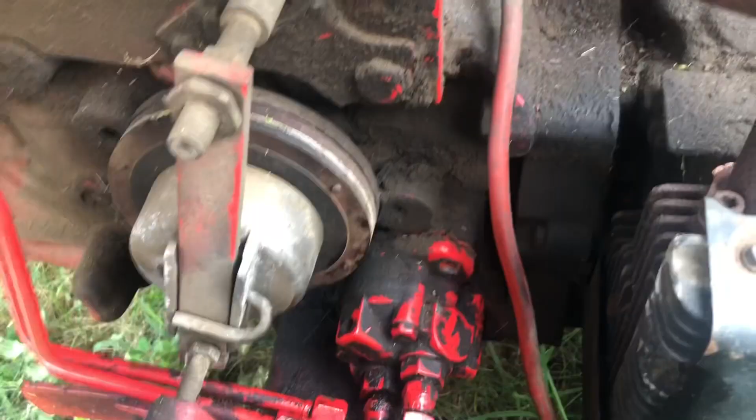going wrong. Oh, look, $2. Perfect. All right, check it out. $2.12 from the old Harbor Freight. It's got the 5/16. It even has a 3/8, and they're short. What do you know? And if I have to cut it, it only costs $2, so I don't give a crap. Awesome. All right, so got the old Harbor Freight short hex key, Allen key here.

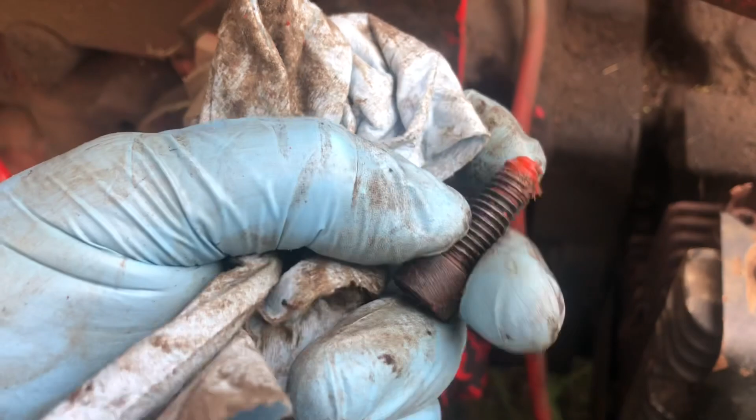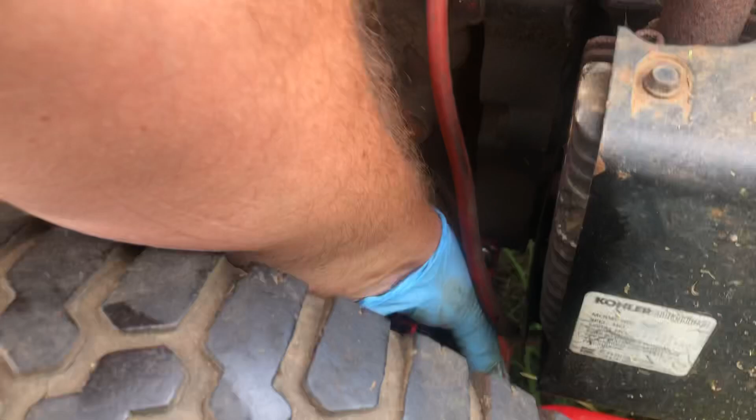I was able to get that bottom screw out, and again, you can tell someone's been in here. It's covered with RTV, which it's not supposed to really have. It's supposed to have a gasket, so let me see if I can get this stupid pump off. Oh. Let's see what's flying with this pump. So the question is, does the pump turn? Number one, it's turning, and I actually see oil coming out of it back here while I'm turning it, so I think the pump is good.

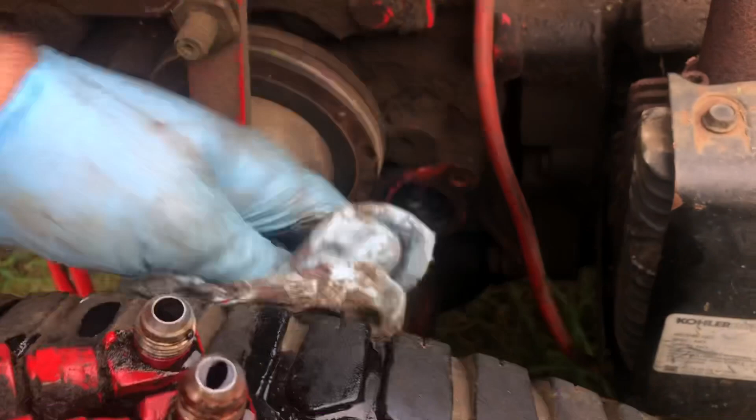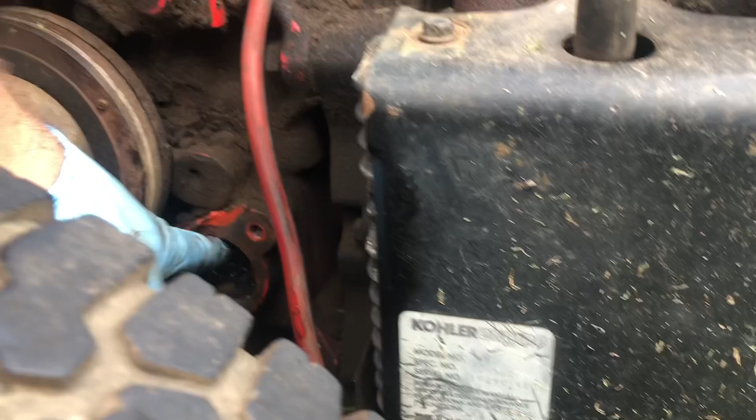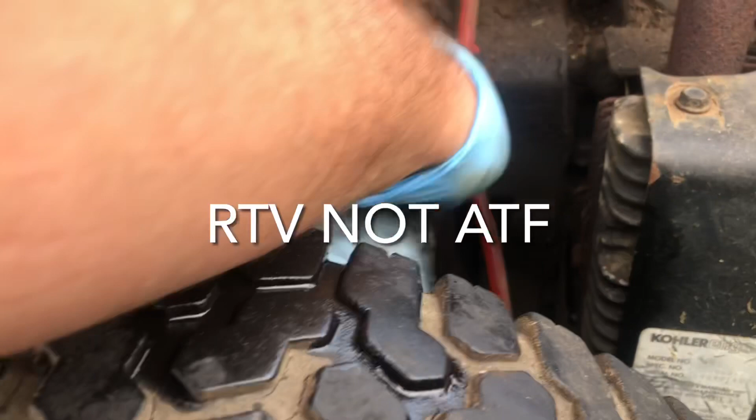So why isn't it working on the tractor is the next question. I'm getting ATF all over the tires. Awesome. So let's take a look in here, and what I want to do is actually start up the tractor and see if that thing is spinning. I just have a feeling that all this RTV on here or something jacked out the pump so that it wasn't engaging properly. And there's lots of milky looking brown oil on here.

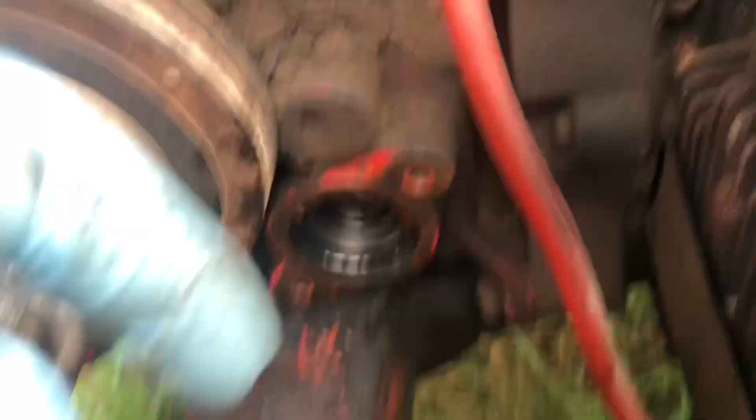Now, I don't know if I start up the tractor if oil's going to shoot out of there, but I just want to make sure that this thing is spinning and engaging. That's my number one concern here. Like, is there a key that's broken inside this gear here or something like that? It's all marred up like it wasn't properly engaging, I'm going to say that much, but the pump looks like it's working. So either this thing's not spinning or I have a problem with the hydraulic valve assembly. So let's see if we can start it up and check it out.

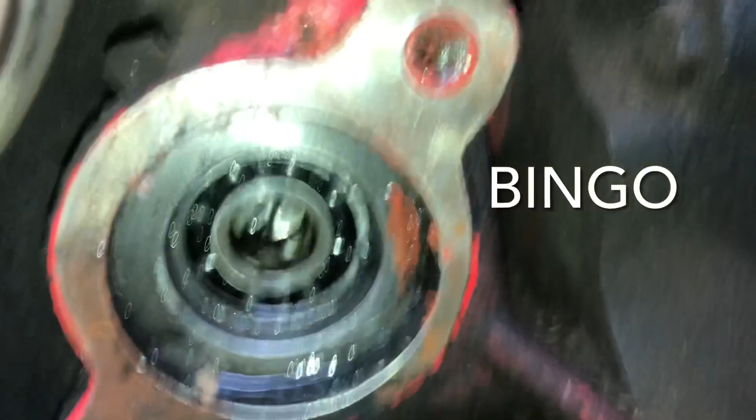So, I don't know if you could see in the video, but I was hitting the key off camera before it started and it wouldn't start. And the stub shaft wasn't turning. And I put my finger on it and just pressed it a little bit. And it started to go into the transmission. I'm like, whoa, that shouldn't be happening. Something had to give way internally on that thing. So, we are going to have to pull the engine off to diagnose it.

And we got the 8163B parts tractor over here, which I planned on taking the engine off of this thing. So my new goal is to pull the engine off the 8163B rust bucket and to take the gears out that drive the PTO pump and put those into the 20G. In the meantime, we are going to pull the flywheel off the 20G and investigate the magnets for the charging system before we start to dissect the whole transmission and everything. So let's get to it.

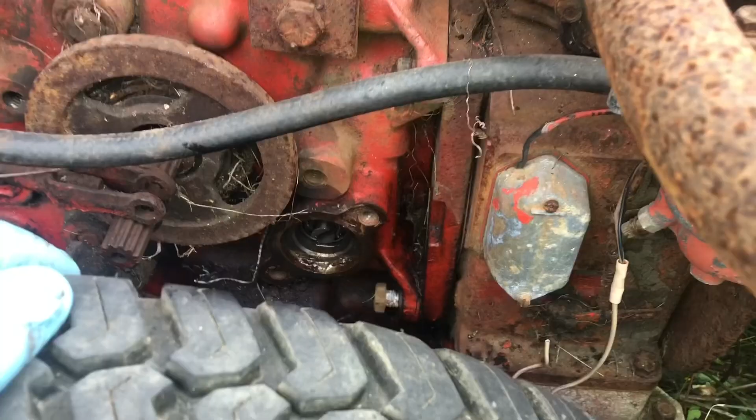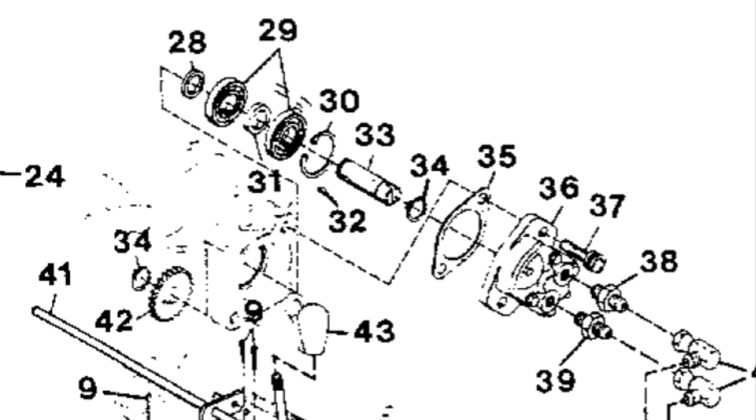Listen, this is the old junk parts 8163B over here. And I'm going to bring you down to look at the stub shaft in here. And this stub shaft here sticks out. And you cannot push it in or anything. It's locked in there solid. That other stub shaft, I was able to push in and it won't turn or nothing. I'm pretty sure that what happened is the snap ring, part 34 here, broke off the shaft and it's letting it slide back into the transmission.

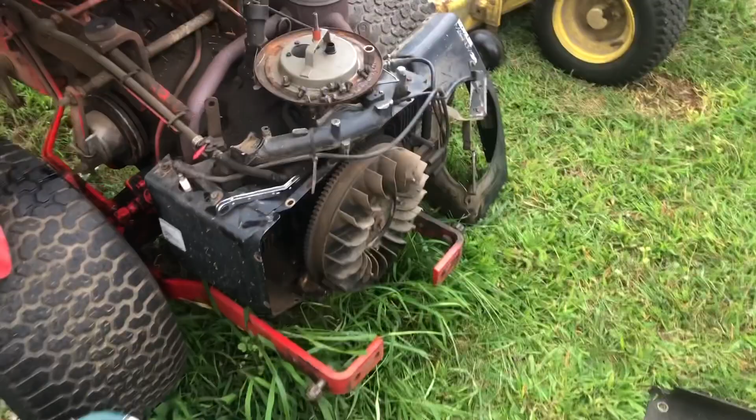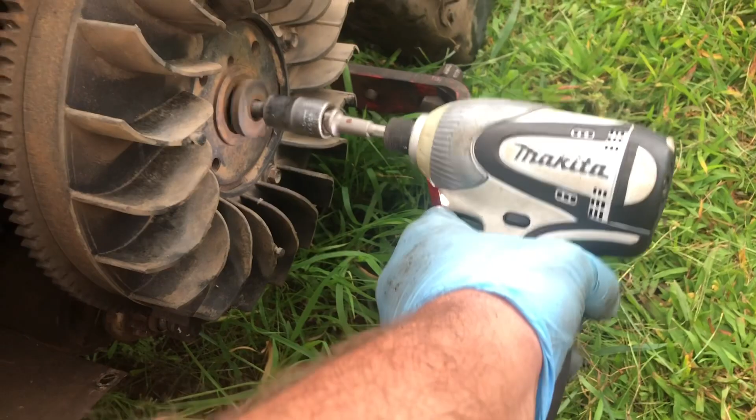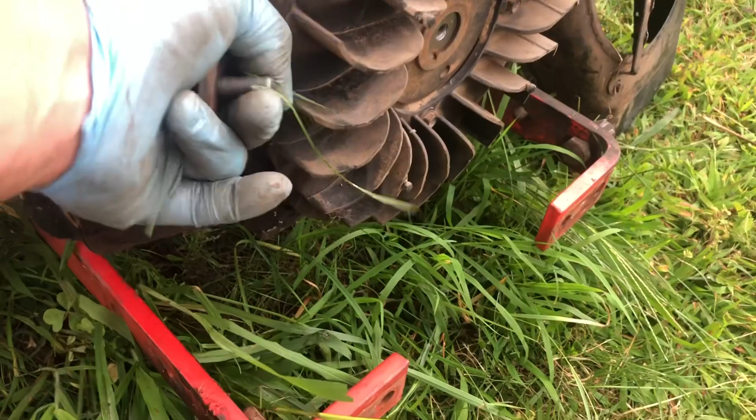All right, so back to this tractor here. I got the shroud and the rear guard off the back so I can investigate this stator issue. And I don't know if this thing has the balls to do it, but I'm gonna try to take the bolt off the flywheel here with my Makita. Let's see. Holy crap, it actually did it. I am shocked. That's awesome. So anyways, we gotta set up the puller and everything here and try to pull this flywheel off. I don't know that you can touch the back because the stator goes all the way around.

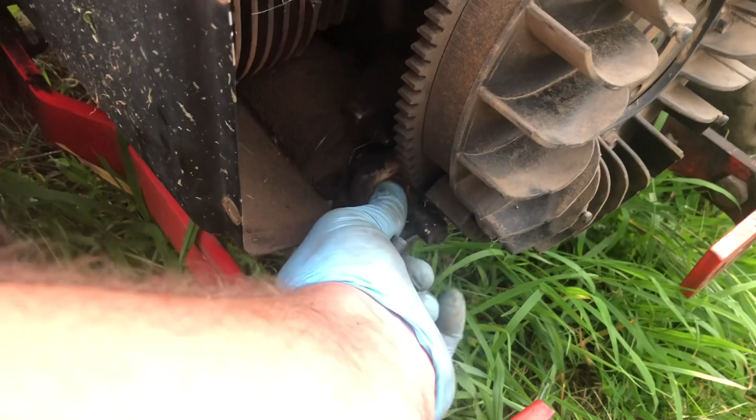By the way, disconnect your spark plugs before you start screwing with this, because if you turn this thing with the electronic ignition, there is a possibility it could start up by accident or something, so I don't want to take that risk, even though the key's off. My Bendix needs some lubrication too. While I'm in here, I'm going to lubricate it. It didn't want to go up when I was trying to start it, and I can hear it's squeaky, so we'll work on that too. But we got to pull this flywheel, so that's our next step.

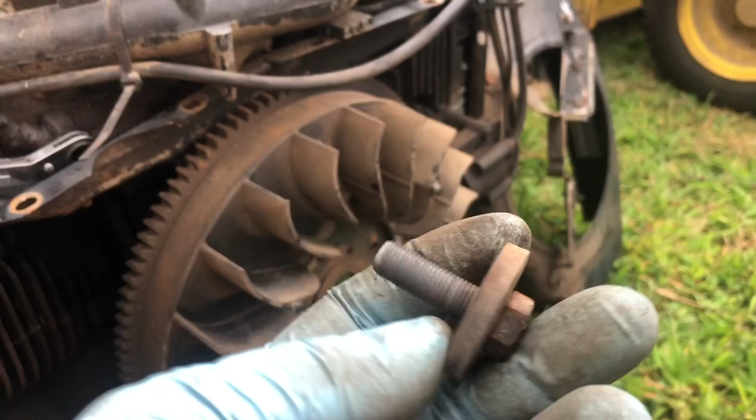And this is using a 3/8 fine thread bolt. The holes in the flywheel use a 3/8 coarse thread, so I'll get my puller, and I don't know if I have something that I can just put over the flywheel here, like a little piece of metal, so that I'm not going into the threads with the puller. But that's kind of the next step here, is to pull it off. So let's see what we can find to do that with.

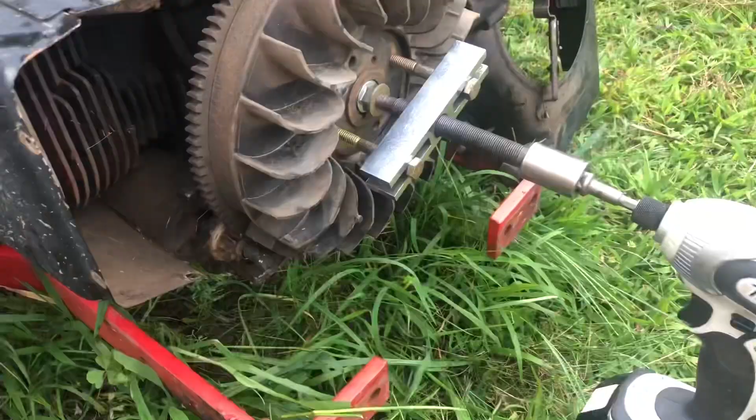All right, so I got my flywheel puller here on there. I kind of rigged up a big nut that I had that covers the whole top of the crankshaft, and I put a little washer on there. I don't know if it's going to work, but we're going to once again test the balls of the Makita. Let's see what happens.

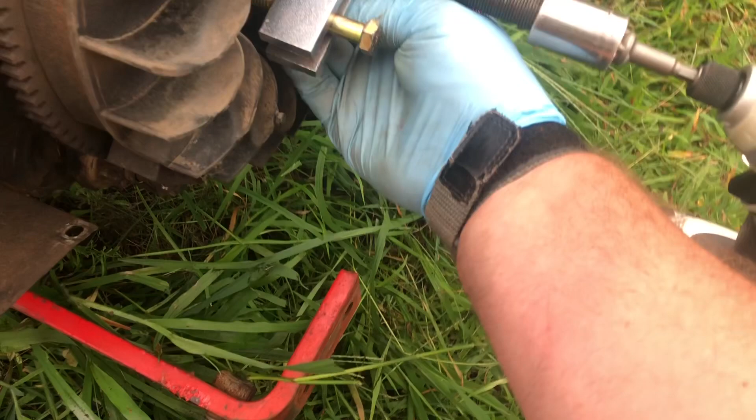I don't know if that nut is hitting the flywheel. Let me try to reposition it upside down. I don't want to bind it up or something, but yeah, it definitely moved a little bit. So let me put the nut on upside down and we will try it again. You see how there's quite a bit of room in there? So let's put this nut on upside down, and we'll make sure it wasn't binding on the edge of the flywheel or something.

All right, so let's give it another shot here. Let's see what happens. Oops, I had it in reverse. Oh, I gotta reline it up. All right, let me check my rotation. All right, we're clockwise. Let's try this again. Let's see. Oh. Not working so good. Drill doesn't have the balls.

The nut's just slipping on the shaft and it's not staying in the center. So maybe that ain't gonna work. I'm too far away from my compressor for the air line to reach out here. So I was hoping I could use that little drill to pop it off, but I'll use the breaker bar, see if I can do it with that.

Man, that thing is tight. I don't even want to screw with it. I just want to let it sit the way it is for a little bit. Let some pressure go on there. Oftentimes you got to whack this with a hammer here. I mean, this thing's solid. I'm moving the whole tractor. So maybe I'll just grab a big hammer and give this a pop.

I don't think it's helping that my nut and bolt setup here is kind of, what's the right word? Not the best. And I suppose I could thread this bolt back in there tight and press against the bolt head, but I really didn't want to risk messing up the threads inside the crankshaft. That would be a really big problem. So let me give this a tap with a hammer and see if that loosens it up.

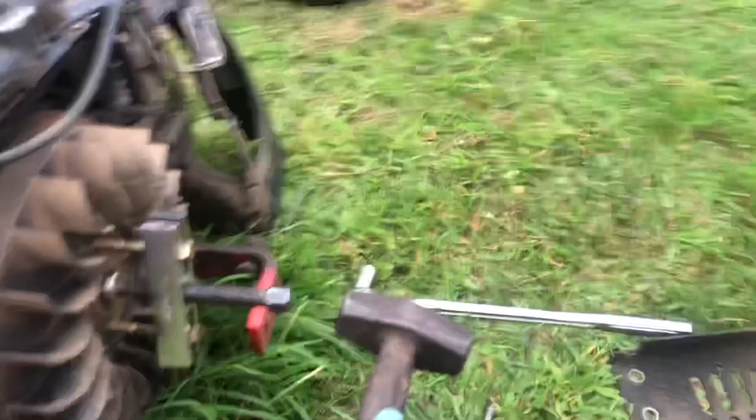All right, so I'm back to the tractor and I got my trusty old True Temper stone hammer. I found this on the side of the road one day and it's awesome. Let's give it a couple whacks. Well, it loosened up, but it probably just pushed the puller into this nut that I got on there. That's probably about all it did.

So let me get my 3/4 inch wrench on here. I'll give it a little tighten again, and give it a couple more pounds. That's probably what's happening. It's probably just pressing into the nut. Let's see.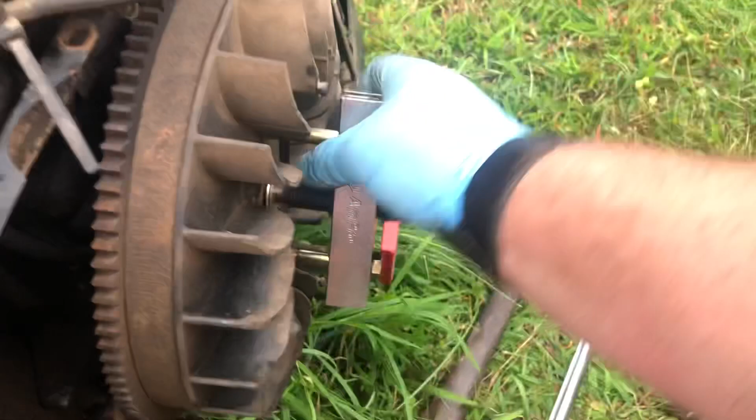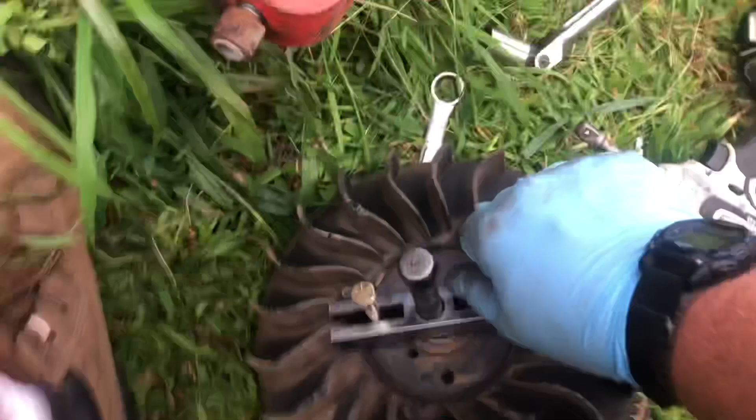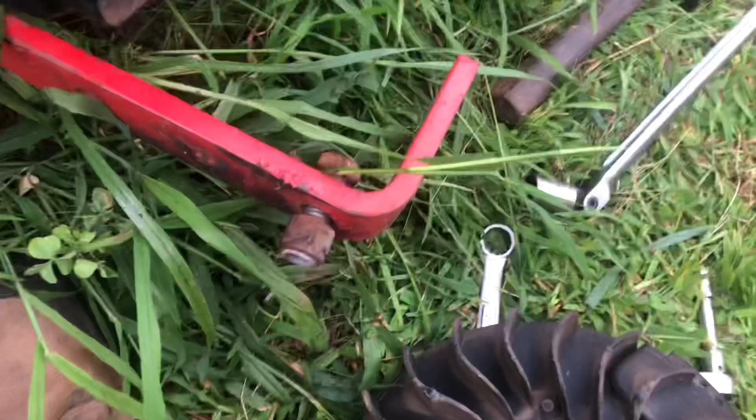All right, guys, so I put the breaker bar back on there and I gave it about a 1/4 turn and she popped off. So let's pull this deal off and check out how ugly the magnets are. Come on, baby. Oh. Gotta be careful not to break these plastic fins on the flywheel. In fact, let me pull off the puller before I go any farther here. Let's see. I should have just unhooked the plastic fins first.

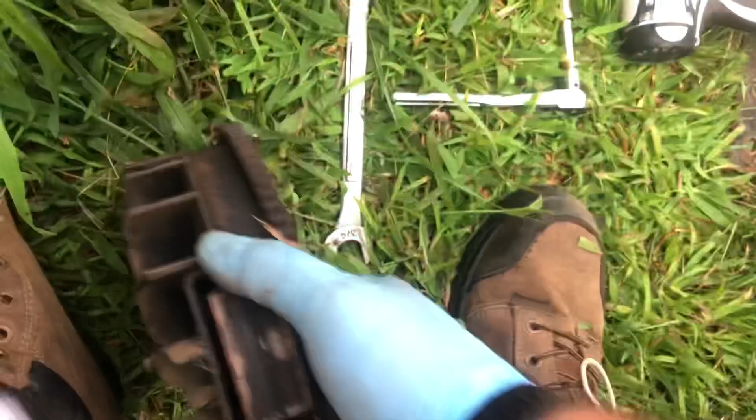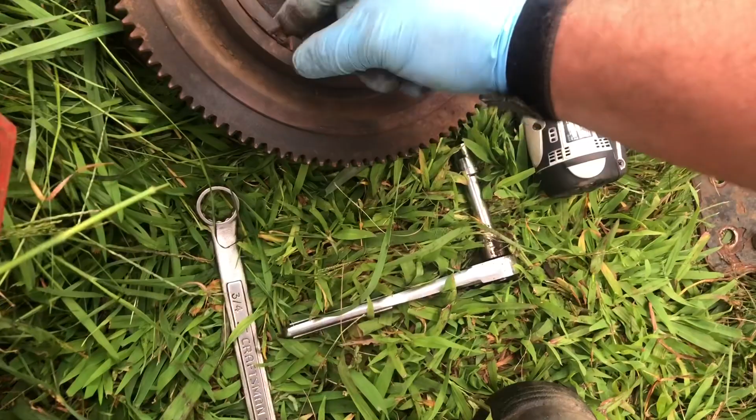All right, here's the moment of truth, guys. Let's see, what do we got? Oh, dude. Careful, fins. All right, that magnet's broken. That's dirt. Is that dirt or is that a broken magnet? Yeah, so this magnet looks intact. This is dirt. This magnet looks fine. So it looks like I'm down 2 magnets on my stator here.

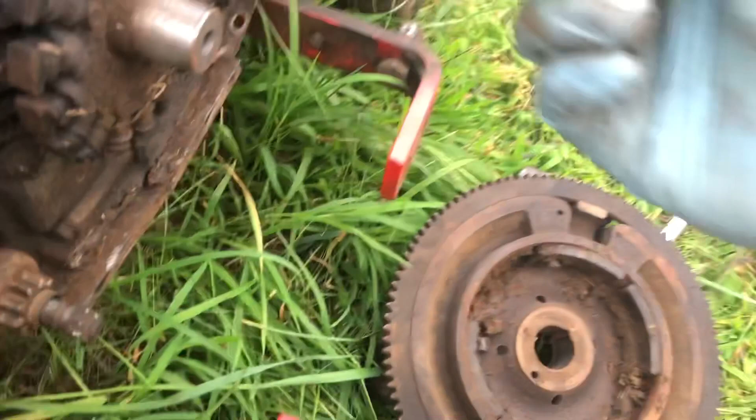Here's a piece of magnet. Is this one good? This one seems to be intact. A little rusty, but it's intact. So, you know, I think that I got to get two magnets for this thing. Here's the pieces of that other one. And oh, look, I got lucky. Here's a magnet that was just sitting on the stator, glued to it.

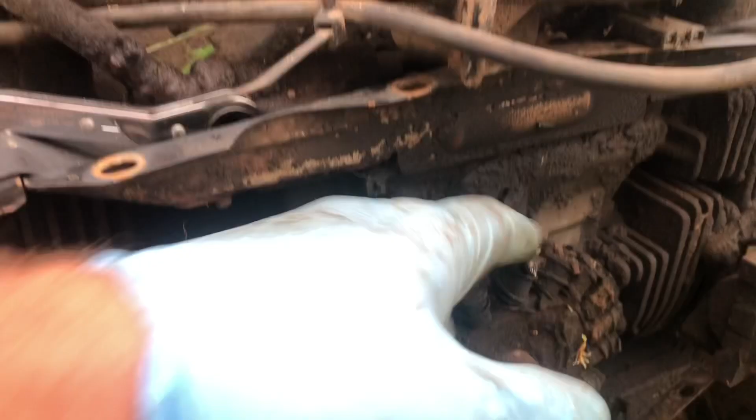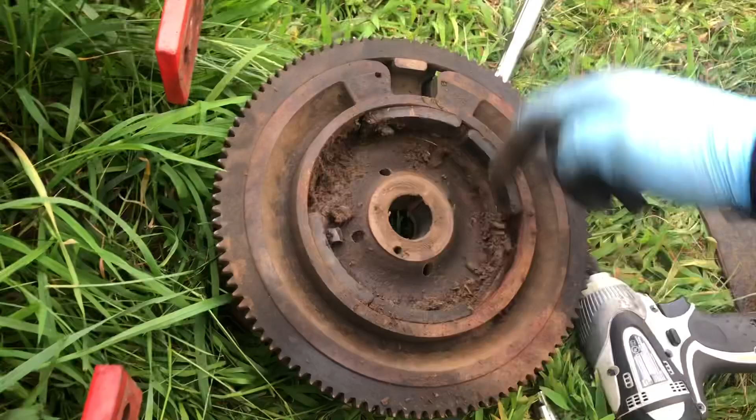And the stator itself is smashed also from the magnets prying against it. I kind of figured that would be the case. So I'm really down 1 magnet. And I don't really know how you pull a magnet out of a flywheel or not. But there's a guy that sells them on eBay in pairs of 2. So I think what I'm going to do is buy 2 of them from the guy, and then we're going to JB Weld them all back in, and hopefully we should have a good flywheel again.

And the stator here, I got to pull the specs on this engine. It's probably a 20 amp stator. And I can easily get a stator or put one that's a replacement on my shelf in here, because that's nothing special. I believe it's the same as a K series stator, so pretty sure I have one of them floating around. But this thing is schmotzed up pretty good, and we are going to have to pull that engine, like I said, so that we can address that PTO gear inside.

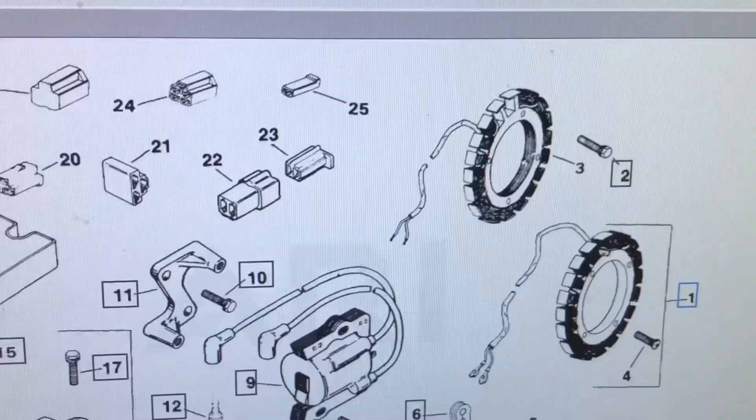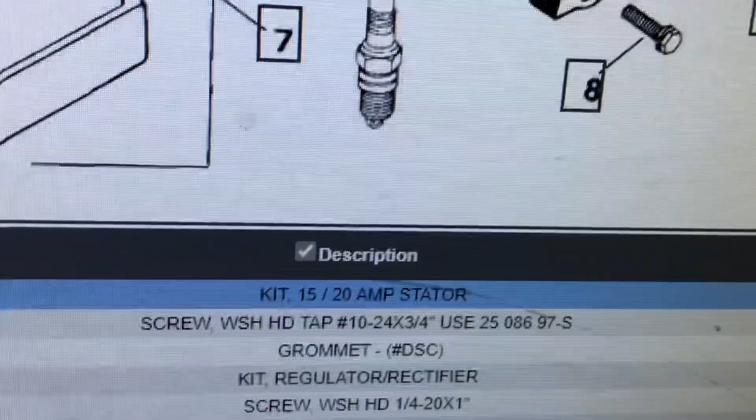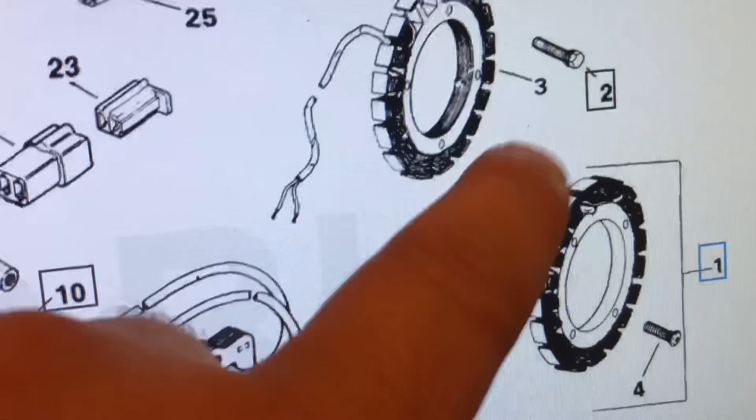But fun. Well, I'm checking out the parts list here for the Kohler, and they got this stator over here, part number 1. Come down here, it gives you the part number, 15/20 amp stator kit. I don't know what the difference is, whether it's 15 or 20, but see how this one has those 2 blanks? I always thought that was a 15 when they got blanks, and a 20 has the ring all the way around. So anyways, I found one on eBay. It looks really nice for 25 bucks, so we're gonna get it.